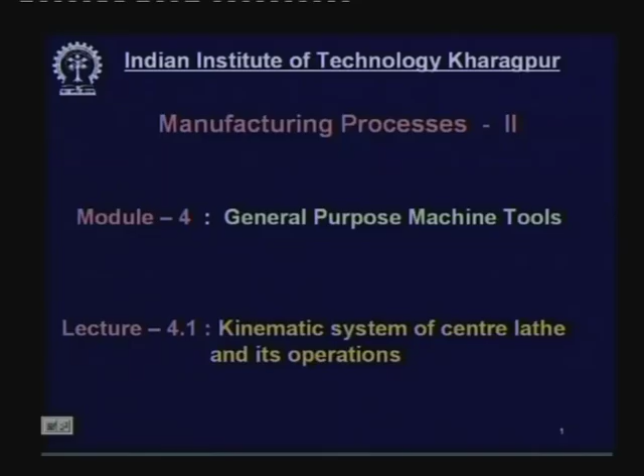This is a new module, a new topic: general purpose machine tools. Till last lecture we continued on machining and manufacturing. Today we shall start with general purpose machine tools. The first lecture under this module will be the kinematic system of the center lathe and its operations.

So what are the contents of today's lecture? This lecture will enable students to name the general purpose machine tools of common use, classify the different types of lathes, illustrate the kinematic system of the center lathe and explain its method of working, and state the different machining operations usually done in center lathes.

Today our topic is the center lathe amongst the conventional or general purpose machine tools. Onward we shall cover other kinds of machine tools like milling machines, shaping machines and so on.

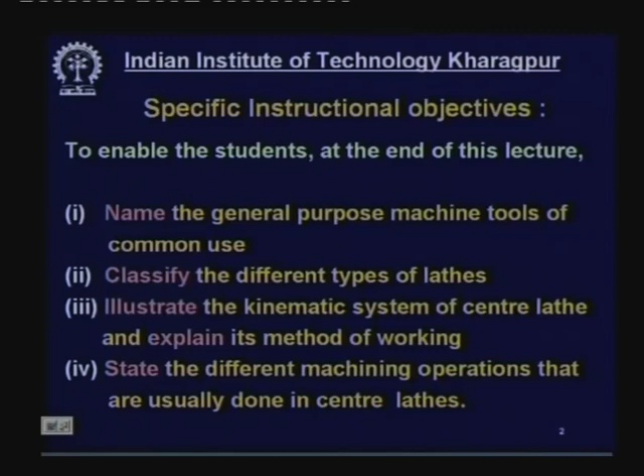Now, what are the general purpose machine tools? These are commonly and widely used in all sorts of machine manufacturing shops. They were introduced or developed long back and are still used in small, medium and heavy industries. Lathes.

Lathes are used to produce cylindrical jobs: internal cylindrical surfaces and external cylindrical surfaces, rod-like.

Drilling machine, in which holes, cylindrical holes, are originated, or sometimes an existing hole is enlarged. This is a small machine, not that very big, some holes are made.

Shaping machines. Shaping machine is a primitive machine which produces flat surfaces, and the flat surface can be horizontal, vertical, inclined like that, but these shaping machines are becoming gradually obsolete and less used.

Planing machines also produce flat surfaces like shaping machines, but planing machines are meant for big jobs, large size of workpieces.

Slotting machine. Slotting machine is basically a vertical shaping machine where the cutting tool reciprocates vertically, and it makes internal surfaces, say holes or slots or keyways in holes and so on.

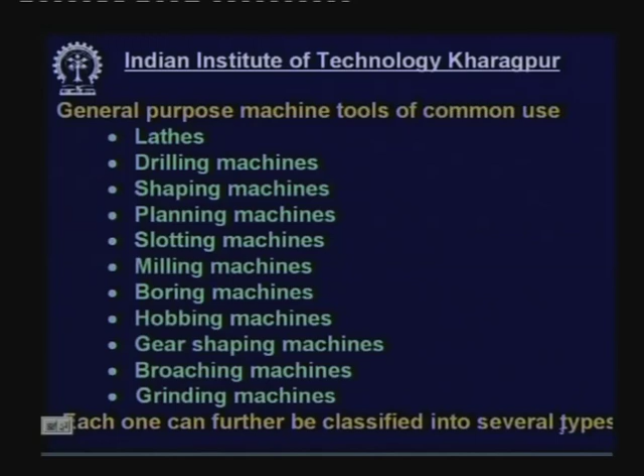Grinding machines represent a slow process of metal removal, but it is used only for high accuracy and finish, particularly when the work material is very hard and cannot be done by machining.

Now, the classification of lathes. Before that we should consider the classification of machine tools. If someone really tries to classify machine tools, there can be a thousand types, or at least a few hundred types. So instead, let us start one by one.

First of all, with the lathe. Lathes are the most common and widely used machine tools, the most primitive machine tool, and these machine tools are most widely used among all the machine tools and most versatile.

So lathes can be classified in a number of ways, in a number of respects, according to configuration. Actually, machine tools like the lathe can be classified in different aspects. So what are the aspects according to which it will be classified? That has to be mentioned. For example, according to configuration, basic shape or standing, horizontal.

Most lathes are horizontal axis for ergonomic convenience. Whatever the size, height, length and power of the lathe, for horizontal lathes the height of the center should be at the waist height of a man of common height, so that he can comfortably and conveniently work on it.

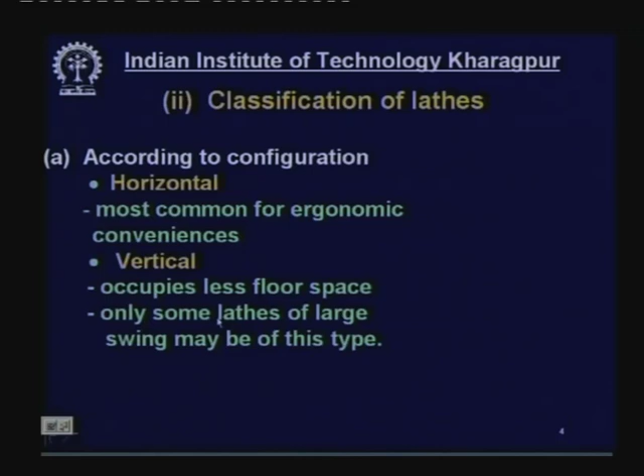But vertical lathes, now there are a few lathes, normally big size, which are kept vertical. The main purpose is that it occupies less floor space, and for ergonomic convenience these machines are kept vertical with the chucks kept under the ground so that the worker can work conveniently. This occupies less space and is used for large swing machines like boring mills, so these are not very common.

Classification of lathes continued. Next is according to purpose of use. What are the purposes of use? Three categories: general purpose, single purpose and special purpose.

What is general purpose? It is the most versatile and widely used type. This is very versatile for wide ranges of material, jobs of different material, different size, different shape can be machined, and various types of machining operations can be done. For example, centre lathes. These centre lathes are so versatile they are called mother machines. It is very versatile and used for general purpose work. Any kind of work on any type of job can be done, but this process is generally manually done.

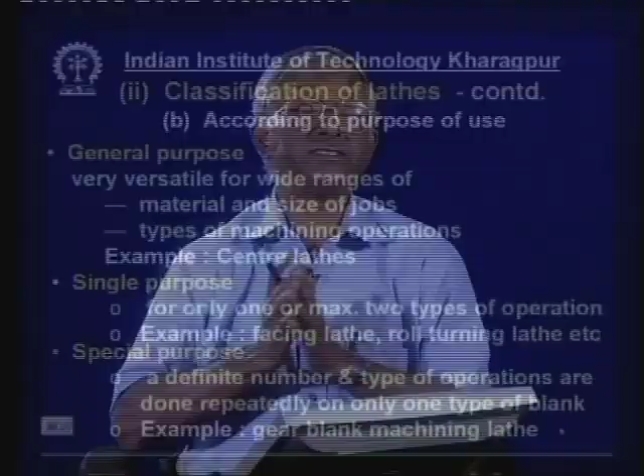Single purpose: from the name it is understood that only one type of operation, maybe occasionally a maximum of two operations, like turning and facing, or only facing, or facing and chamfering, or turning and grooving. So only one or maximum two types of operations will be done on different job materials and job sizes within a limit. For example, facing lathe - here the chucks are very big, where disc type jobs are faced. So jobs are of large diameter but short length.

Roll turning lathes, where the rollers of rolling mills are finished by turning, and maybe some grooving and chamfering work can be additionally done, but basically these lathes are meant for turning the rollers of rolling machines. Similarly, copying lathe can be one single purpose machine, and other machines.

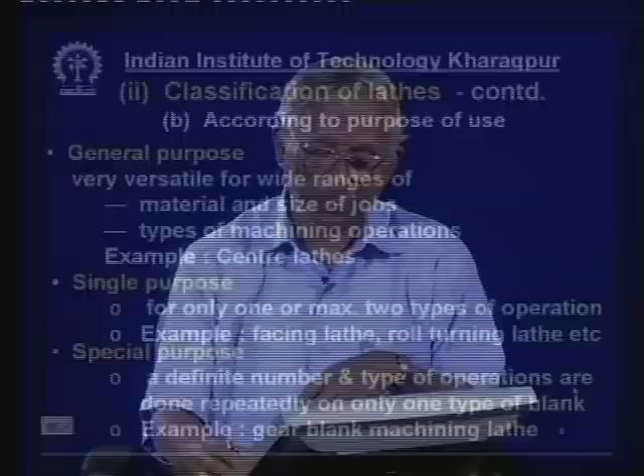Now special purpose machine tools, where these are for a special type of job. A particular type of job will be machined over a long period repeatedly. A definite number and type of operations, say 6 or 7 operations of a definite type, like drilling, boring, thread cutting and milling, are done repeatedly - the same work, same set of operations, done repeatedly over a long period, maybe months or years, on a particular type of blank.

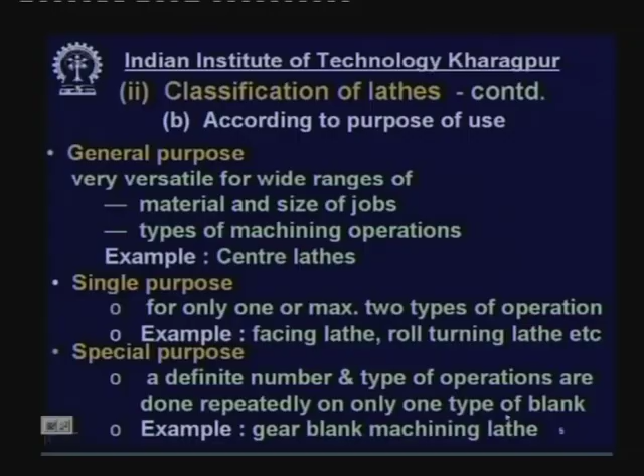For example, gear blank machining lathe, where blanks of gears, maybe spur gear or bevel gear, will be machined over a long period. Another example is the sewing machine body, which needs machining operations like drilling, threading, boring, facing at different locations, and this set of machining work will be done by the same set of tools over a long period. For that, a particular dedicated machine tool will be utilized, which cannot be used for other kinds of jobs.

What is the next classification criteria? According to size and capacity. Size is visible, and capacity is measured in terms of power, depth of cut, cutting velocity, feed and so on. There is no really hard and fast line of demarcation between small, medium, large or micro, but generally we call them small, medium, large, very large, mini or micro lathes.

Small lathes are also called light duty lathes, where depth of cut, speed, feed etc. are less, and the power consumption is also less, with a maximum of around 2.2 kilowatts, not more than that. Jobs will be of small size, commensurate with the size of the lathe and power availability, and the cutting force should not be very high, so the material should not be of an exotic type that is difficult to machine.

Medium size lathes have power within 2.2 kilowatts to 11 kilowatts. Most of the centre lathes used in industry are of this category, medium size, and these are the most common obviously. Then large, heavy duty lathes.

So this lathe should be very small, and another set of lathes called CNC lathes, which are computerized, are also used for making small parts of mini robots or mini machines. The robot or machine size can be say 1 centimeter cube, and it may have 100 parts, all of which will be machined in this micro lathe, which is numerically controlled and computerized.

Now, according to degree of automation, we know what is the purpose of automation. Automation is a system, device, or mechanism that enables very quick, easy production with a huge amount of jobs with consistently high accuracy. So this is the purpose of automation: get the work done quickly, accurately, and consistently without human intervention or with minimum human intervention. This is a very economic process for mass production.

Now, machines like lathes are also categorized with respect to the degree of automation. Many lathes are automated, mechanized, non-automatic, semi-automatic, and automatic. Now, how are they classified?

Non-automatic. Now, you know that in machining operations, say for turning a rod in a lathe, before we machine or remove the material, a lot of preparatory work has to be done. The job has to be mounted on the lathe, the cutting tool has to be mounted, speed, feed, and depth of cut have to be adjusted, cutting fluid has to be turned off and on, and the motor has to be turned off and on. All this preparatory work is not directly connected with chip formation, but it is essential, you cannot avoid it, and these are called inevitable operations.

These operations, apparently non-productive, are called handling operations, and another set of operations called processing operations are directly associated with chip removal, like facing, turning, drilling, boring, finishing, and parting.

Now, whether a machine tool will be called automatic or non-automatic, or the degree of automation, will be decided by to what extent the handling operations are done automatically. It does not depend upon to what extent the processing operations are done. It may be that all the processing operations are done automatically, but if all the handling operations are done manually, then the machine will be called non-automatic. So the degree of automation is decided by to what extent the handling operations are done in a mechanized way.

Now come to the definitions. Non-automatic: all the handling operations are done manually, irrespective of the processing operations. For example, centre lathes.

Now, automatic. It will be called automatic only when all, or almost all, of the handling operations are automated, and obviously the processing operations as well, since there is no way out otherwise. So when almost all the handling operations and the processing operations are done automatically, this kind of lathe or machine tool will be called automatic. For example, single spindle automatic, Swiss type automatic lathe, automatic cutting off lathe, like this.

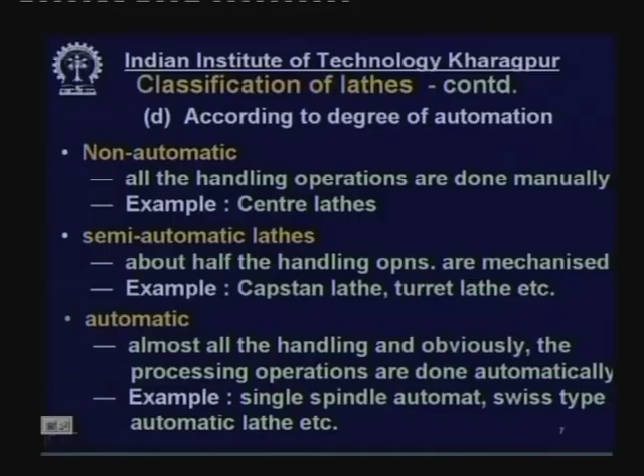Now, the characteristics of these machines are that they are very compact, very complex in shape and design, but operation is very simple, just push button type. Maintenance is difficult if there is any fault, and these machines are expensive. Advantage: these machines work very fast, production rate is very high, and the quality is also good and maintained consistently over a long period, but these are costly.

Now, according to type of automation—previously we observed according to degree of automation. Now let's see according to the type of automation. The kind of automation we are familiar with till 1965 are all fixed automation.

These are called fixed automation, very conventional, often called hard automation. Why hard or fixed? Because this automation is achieved by incorporating a lot of additional devices or systems—mechanical, electronic, electrical, electromechanical, hydraulic, computers, and so on. But when all these components are mechanical, hardware type, then these are called fixed automation or hard automation.

If there is any change in the job or product, a lot of changes have to be incorporated into the machine—components have to be replaced, thrown away, new components designed and brought in. So the changeover cost from one product to another will be tremendous, and it is very rigid, so changing to a new product is very difficult.

Example: single spindle automatic lathe, Swiss type automatic lathe—these were invented maybe about 150 years back. So these are all hard automation or fixed automation, driven by mechanical devices.

Another category has recently come up, targeting batch production. Fixed automation is very good, economically applicable for mass production or huge production, because the initial cost is very high, and changeover cost is very high.

But the present and future trend is batch production instead of mass production. So when there is batch production, the product's size, shape or category changes rapidly or frequently. So the machine should be capable of coping with the changeover of the job from one design to another, one shape to another, one dimension to another.

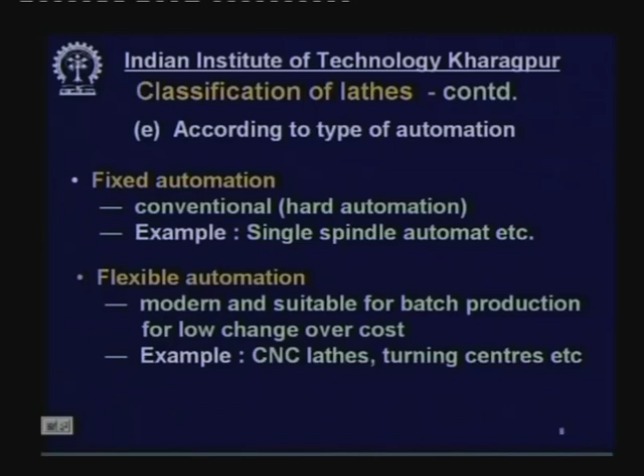Now, the classification of lathes according to job configuration. What kind of configuration of the job the lathe handles is another aspect of classification of machine tools. This kind of classification is appropriate for automatic machine tools, automatic lathes.

One class of automatic lathe handles bar type jobs—rod like, slender blank held in the collet, and jobs are made one by one, cut to size and dropped into the bin. Then this rod is fed again for the next job to be done.

Chucking type deals with disc type jobs normally—blanks of gears, pulleys, rims, clutches, like that, disc type. These are held in chucks; there can be one chuck or a number of chucks. So bar type is most common—Swiss type automatic lathe, single spindle automatic lathe, multi spindle lathe—bar type, these are very common.

Chucking type is less common. Housing type: sometimes the jobs are very complex, just like a housing or box-like, irregular size and shape, which cannot be held either in a collet or a chuck. They are mounted on a large faceplate, which has a number of slots radially and tangentially, and this faceplate is mounted on the lathe spindle, and these odd shaped jobs are fixed on it by clamping. This is not very common; it is only for few occasions and complex shaped jobs.

Now, the classification of lathes according to precision or process capability. Machine tools are assessed in terms of productivity—rate of production—and process capability, how accurate, how it can maintain accuracy of the product, the ability to produce and maintain accuracy. According to that, lathes are categorized into two groups.

One which are ordinary, called common. Most lathes are ordinary, which are not that precise, and dimensional accuracy will vary from 10 to 50 microns—this is very common.

Precision lathes are occasional; these are very special and very expensive, and only used when required. These are characterized by their capability to provide high dimensional accuracy and good surface finish, and these are costly. Only when it is required is it used, so that the job can be finished to complete dimension and finish without grinding.

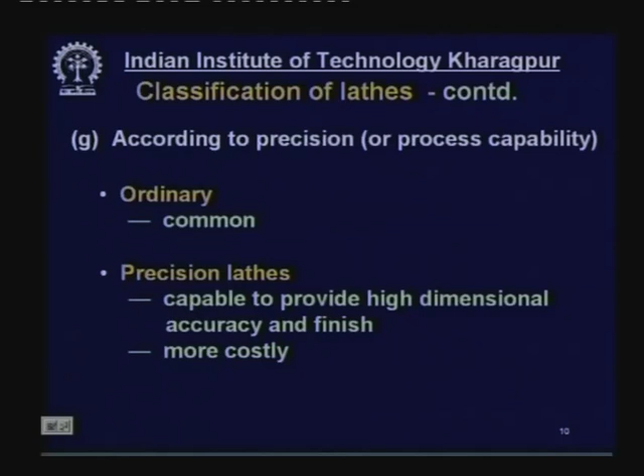Now, the classification of lathes according to number of spindles.

In our whole body there is only one head, so one head thinks and the whole body does the work. Now suppose if we have two more hands on the back side. From the front, two hands on the front side we can do some work, and two hands on the back side we can do some more work. So the productivity can be improved.

This is just a guessing or an analogy, but in machine tools sometimes more number of spindles can be provided, but most of the lathes are single spindle. Single spindle lathes, most of the lathes are of this type, where there is only one machine, one spindle, and in the one spindle one job is machined at a time until it is finished.

In multi-spindle lathe, the machine tool is quite large and powerful, and a job to be produced in huge quantity over months or years requires a very small number of operations, and the jobs are simple and small but produced in huge quantity. For such repetitive work of limited operations, instead of one spindle, the machine can be provided with more than 1 - 2, 4, 6 or maximum 8 spindles - and the productivity will increase with the number of spindles, though not exactly proportionally.

These are used for fast, rapid production of large volumes of jobs of simple shape and small size requiring small number of machining operations. For example, say the bearing races.

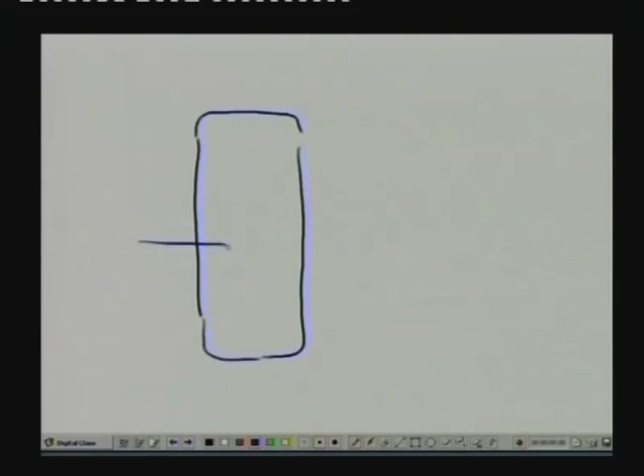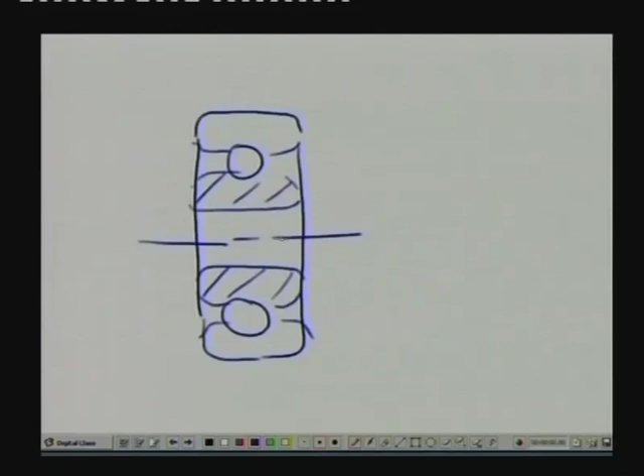Let me draw a bearing, a ball bearing. This is the center and this is the balls, and this is the inner race in which the job is fitted. This is the job or shaft on which this bearing is fitted. Now this is the inner race and this is the outer race.

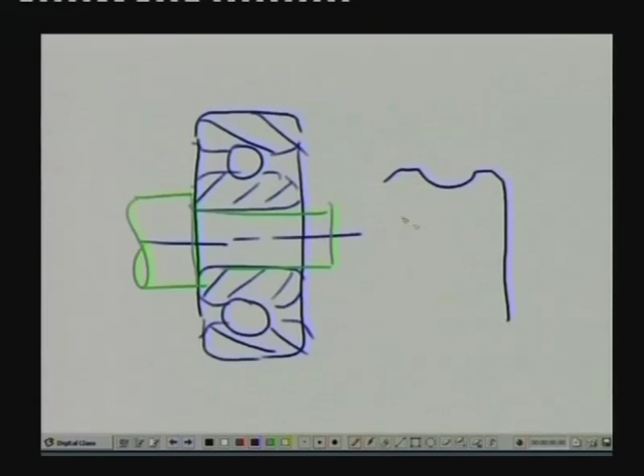Now let me draw the inner race. What is the shape of the inner race? Like this.

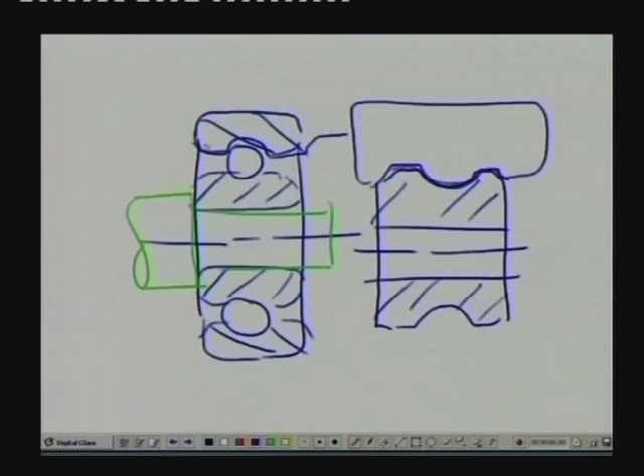This is the form tool by which this particular form will be machined. Similarly, this form will be machined by another form tool. So these are the form tools, and just one form tool will produce this. You start with a small ring or a rod, this part will be formed, and then this particular form will be produced by a form tool. So this kind of bearings, inner race and outer race, are produced in huge quantity very rapidly by multi-spindle lathes.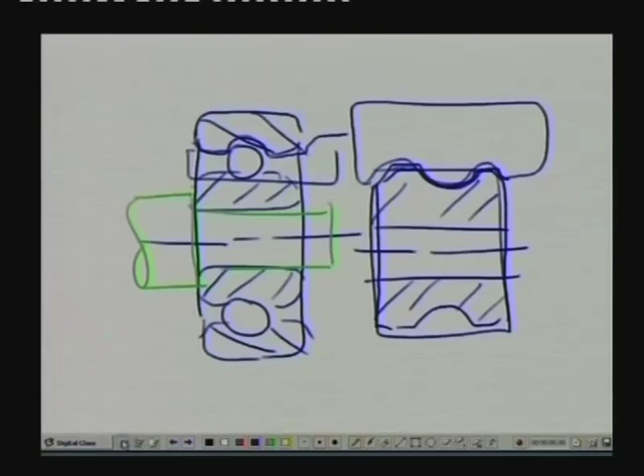This is one example. There can be several more other applications of multi-spindle lathes.

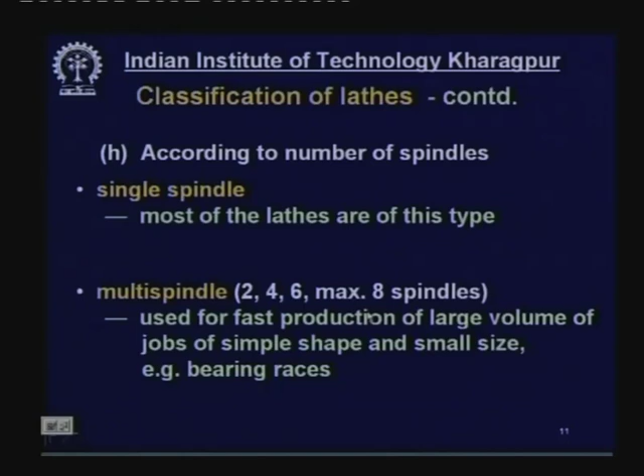Now come to the next topic, the kinematic system of center lathe. Today we are discussing center lathe only, and the kinematic diagram in detail, because this center lathe is the most common and widely used lathe, and if one understands the kinematic system or arrangement of this machine tool, he can easily learn the kinematic system of other machine tools.

Now let me tell you the basic configuration of this. Kinematic system means the arrangement or system of mechanisms or chain of structures which enable providing motions to the job and the tool. So this kinematic system deals with transmission and transformation of motion at the cutting tool and job.

So we need a number of spindle speeds. This function is called the speed gearbox, comprising a number of gears called cluster gears within the headstock. This will split the speed coming from the motor into a number of spindle speeds, from low speed to high speed and medium speed. So the job can be rotated at any one of the 12 or 18 speeds available.

Now, these cluster gears have got stages. This is called the cluster, and these are called fixed gears. By shifting this gear cluster, we can get 3 speeds multiplied by 2, multiplied by 2, that is 3 into 2 into 2, so there may be 12 speeds available.

Now this is the tailstock, which has the center, the tailstock center, which can be static or revolving, and this gives the support. Sometimes cutting tools like drills or reamers can also be mounted here, and this will be moved gradually to get the work done in the workpiece.

Now this is the saddle or carriage. This is the cutting tool which travels in a direction. The movement of the tool is called the feed. It can be longitudinal feed, that is along the axis of the job, so the tool moves, called longitudinal or axial feed. Another feed will be perpendicular to the job, in this direction, called radial feed or cross feed.

Now this cutting tool is mounted on the tool post. The tool post is mounted on the compound slide. The compound slide can be traveled by a screw manually. By operating the screw manually, this slide can be moved forward and backward, so you can give the feed manually.

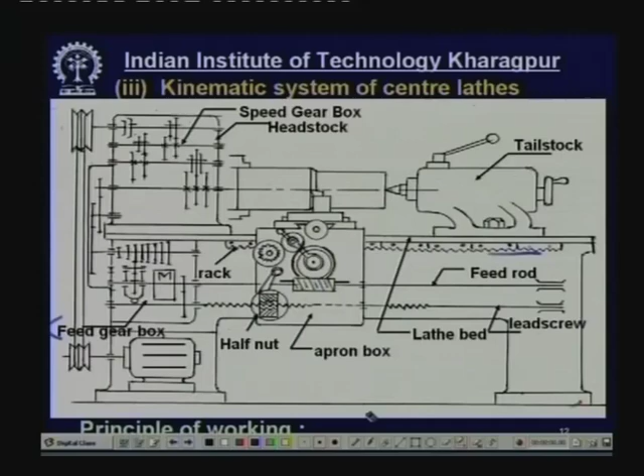Let us come to the machining operations that can be done in center lathes. As I told you, center lathe is a very versatile machine tool. Amongst lathes also, the center lathe is the most versatile in the sense that a large number of operations can be performed over different sizes, diameters and lengths of the workpiece, and of different material. So the most versatile and huge kind of operations can be done.

Now we can see what are those operations which can be performed in center lathe. Generally these are the operations I am now telling. For example, facing. What is facing? It was told in my previous lectures. Now I am showing you facing.

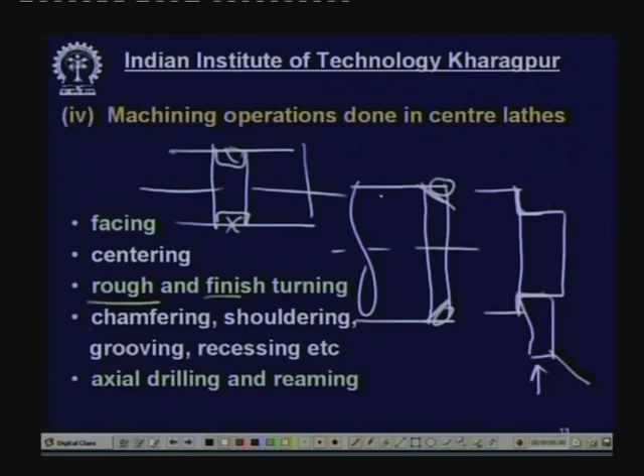Grooving. What is grooving? Here is a job rod. Now we want to make a groove by removing this material. So this is grooving. Similarly, recessing kind of work can be done.

Next is another set of operations called drilling, axial drilling and reaming. Here the drill is fitted into the tailstock, and the reamer for finishing is also held in the tailstock quill, and the tailstock is gradually moved. This is not very common practice. This is for repair, a small lot of work, a few pieces. This is not very mass production type.

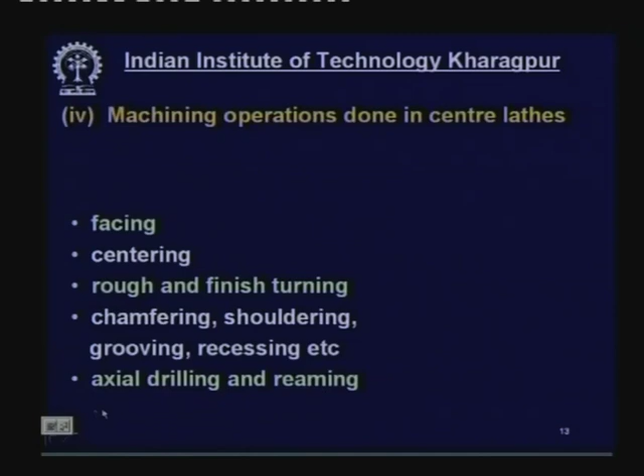This can be done in a number of ways in a lathe. One method is by offsetting the tailstock. The tailstock will be slightly shifted radially, and that will enable production of a small taper angle over a large length. So longer length but short angle can be achieved by offsetting the tailstock.

By swiveling the compound slide, this is for medium small to medium angle and medium length. Here the cutting tool will be moved in this direction. The tool is mounted on the compound slide and that will be tilted manually, so you can move at an angle parallel to the job to be produced.

Now, using a form tool - here form tools are used for small tapers. For example, if we want to produce a small taper like this, we can use a tool like this, and the tool will feed in this direction, producing this taper. So large taper with short length will be produced using a form tool.

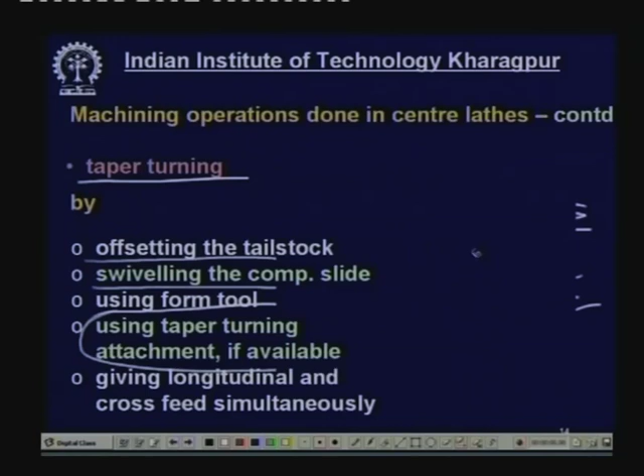This is also possible in some lathes where, suppose this tool is here, you give the cross feed in this direction and longitudinal feed simultaneously. The result of these two combined will produce the taper, as the tool moves simultaneously in this direction.

So this can help in producing taper jobs by combining both feeds, but this is a very risky thing, and in very few lathes is this provided, otherwise there is a chance of accident. So this is a very rare application.

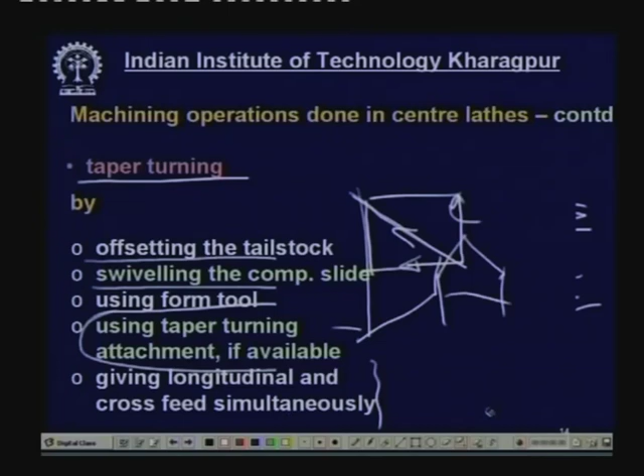Next is boring, machining operations for boring. Boring is an internal turning operation which is used for producing internal surfaces for straight, taper, or stepped holes, for enlarging some existing hole already produced by casting, forging, or some other method, and boring is also used for finishing work.

For finishing work - finishing means to improve high accuracy and surface finish. So the boring machines used for this are expensive.

Forming - several types of forming, both external and internal, are possible. For example, machining the grooves of typical forms of the inner and outer races of ball bearings, roller bearings, as I already explained to you.

So this is forming. For example, say here is a rod with a collar and you want to make it round. So you take a tool like this and feed in this direction. This particular form of the tool will produce this kind of job. This is forming, which can be external, internal, and in other ways.

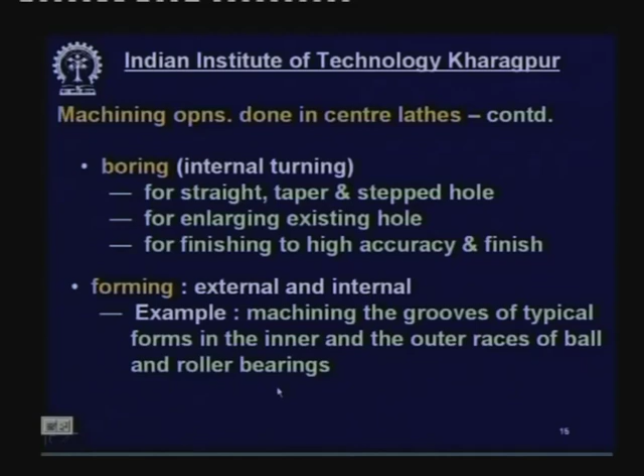Now, other operations include cutting screw threads, external and internal screw threads, both are possible. These have been discussed with a lot of illustrations in the previous lectures.

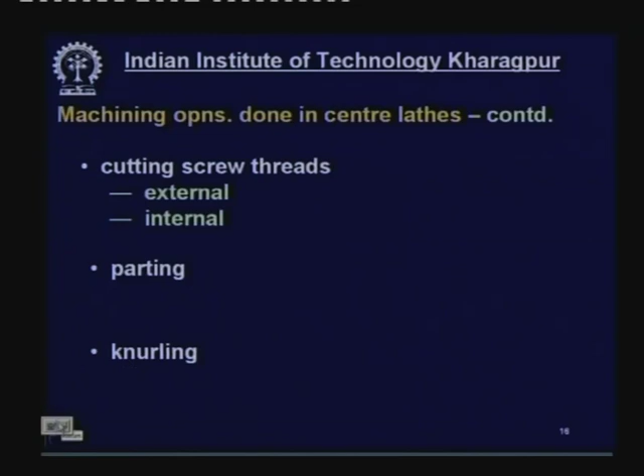Parting, where a rod will be parted into two pieces by a parting tool, and knurling for making the surface rough for the purpose of handling. This is knurling - suppose here is a handle of an instrument, and for holding purpose this has to be rough for gripping. This kind of groove or rough surface is made by the knurling process.

Beyond the usual operations, some special operations can also be done by mounting special attachments. What are these attachments? One is cylindrical grinding.

In cylindrical grinding, suppose this is a job and it has to be finished by grinding. So instead of a turning tool, you use a grinding wheel mounted on a motor. The motor will be mounted on the saddle. So this will move in this direction and this will rotate. This is an attachment.

Similarly, thread milling - threads of long power screws are produced by the milling process using a milling cutter, driven by a separate motor and mounted on the saddle of a lathe. Thread grinding - threads are finished by grinding, also done by an attachment, and producing profiles by copying.

Some hydraulic copying attachments are available in the market, which can be mounted on the lathe saddle or clamped, and then used for copying. The job to be produced has to be fixed at the bottom as a template, and the stylus will copy it and reproduce it into the tool by a hydraulic copying servo system.

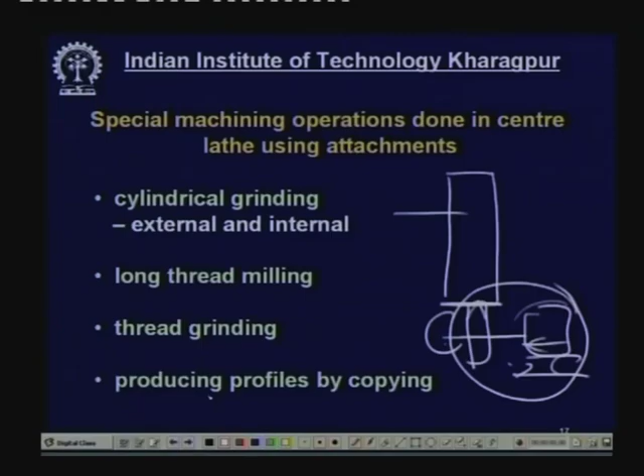Beside that, a few more operations can also be done if challenged or essentially required in a lathe. So the lathe is very versatile, and the maximum number and type of operations can be done in a centre lathe, unlike any other machine tools. Thank you.